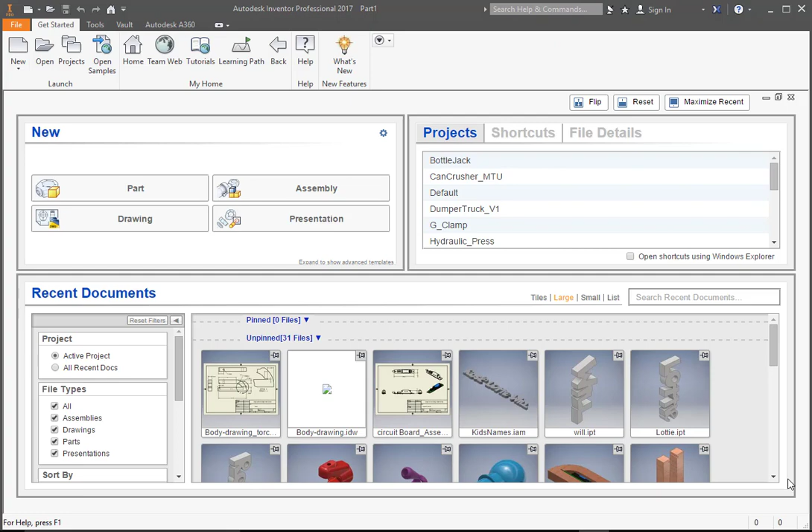This recording is for a small wooden storage unit, and I'm going to draw a side, a top, a side, a base and a shelf. So those are all separate components. Some of the components we're going to use twice, so that'll save some drawing time. So we're going to go new, check it's on metric, standard millimeter part, and create.

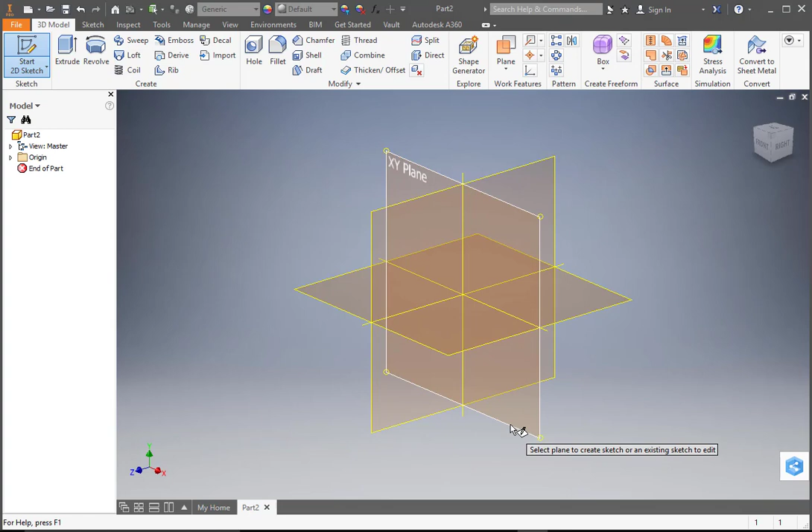Okay, now first thing we do, if you remember, you can either do start 2D sketch, or I can right click and do a new sketch. I'm going to just do up here for a minute. Okay, and I'm going to draw the side, so I'm going to use the side view on the XY plane, and I'm going to draw the side by clicking to select that drawing surface.

Next, I'm going to use my rectangle tool up here. I'm going to click in the middle, drag it out, and press click to stop the drawing. Now I'm going on to my next tool. You'll notice that I didn't dimension that, I didn't give that any measurements. So I'm now going to go on to another tool and just dimension that object.

Okay, and that object is going to be 200. I'm just going to use the middle mouse button to scroll out. 200, so it's now become very narrow. So I'm going to choose the bottom one and drag out, and make that one 60, and press enter. So if we have a look at our shape now, we've got a rectangle which is 60 by 200.

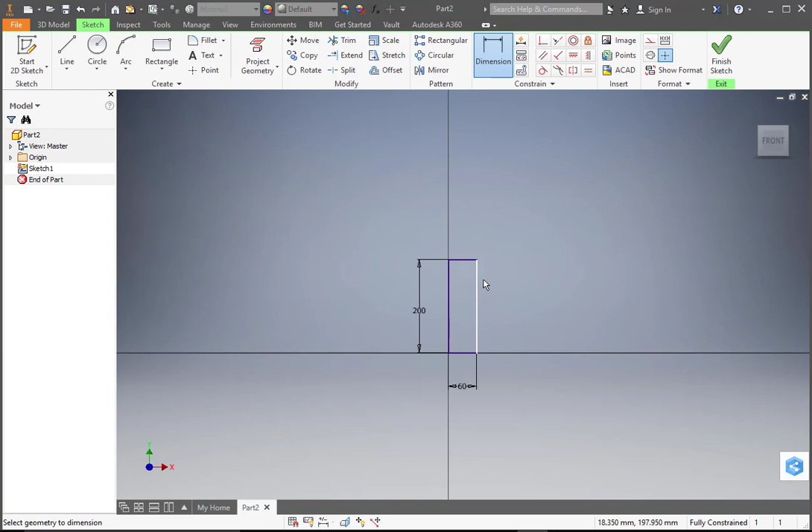So at the moment we've got a rectangle 60 by 200, and what I need to do now is step in to create a joint at the top. Okay, now I'm going to draw a line which is going to be the thickness of my material, and I'm not going to worry too much about where I put it, but I am going to make sure it runs straight and runs from the left hand side to the right hand side, joining up with those lines.

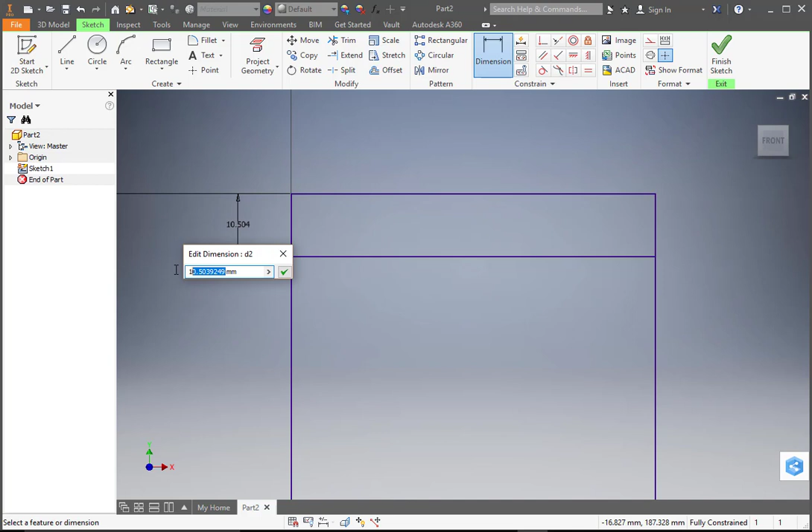I'm going to now position it again using my dimension tool. So if I click on the first line, click on the second line, click to place my dimension, and then I'm going to type in 10 because I want that to be 10 millimeters from the edge. Okay, I'm going to come down to the bottom.

We'll keep this simple, I'm going to do exactly the same thing again. So to remind you, I'm navigating around quite easily. Middle mouse button, scroll wheel zooms in. Clicking and holding down the middle mouse button allows me to drag it. Okay, so I'm going to zoom in at the bottom. I'm going to do exactly that process again.

Line tool, click, click, and then use the dimension tool, click, click, and drag, and then click to plant it. That was 10. Okay, so I've now got top and bottom, a 10 and a 10.

Okay, now what I've got to do is to now trim off in the middle. So I'm going to divide my 60 into 20, 20 and 20.

Right, now a couple of ways of doing this, but the easiest way is going to be to use the line tool. I'm going to click somewhere on this line and come up, and then click somewhere on that line and click on the top. So you'll notice that none of those have got proper dimensions at the moment.

If I now use my dimensioning tool, I'm going to click on the edge, click on the second line, and that means that line is now positioned 20 millimeters in from that line. So the next thing I'm going to do is dimension there and there. Click on the outside line, click on the inside line, click to plant it, turn it into 20.

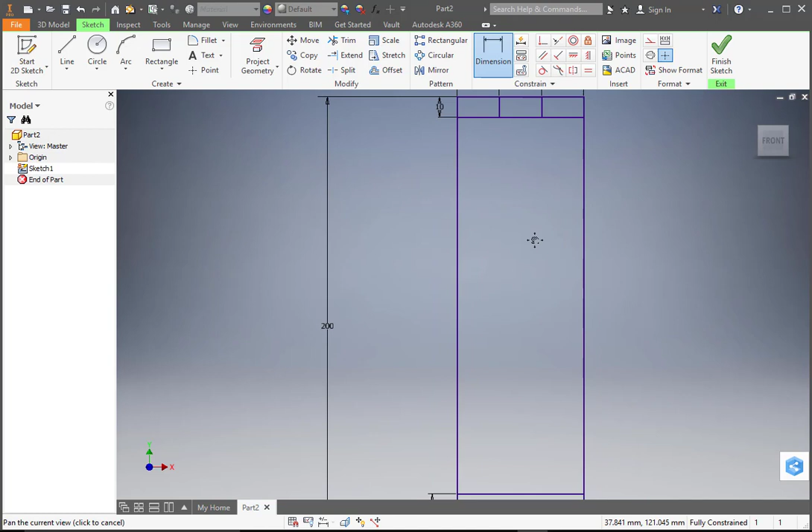Okay, now I'm going to do exactly the same thing on the bottom. Line tool, click on that line. You'll see that the lines try and snap to each other anyway, which means they connect sort of automatically. Then back to my dimension tool, click on the edge, click on the line, plant the dimension, 20. Click on the edge, click on the line, click to plant the dimension, and 20.

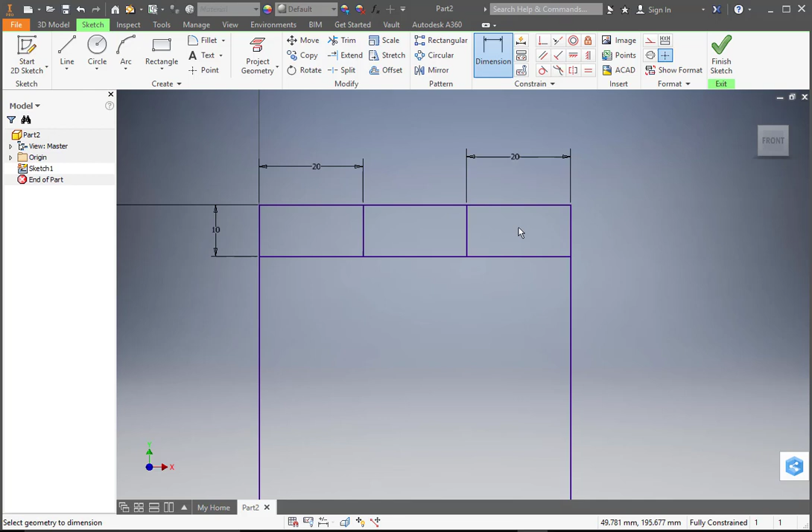Okay, now at this point I've actually finished this sketch. I'm going to try and save this, but I'll need to come out of my sketch first. This will allow me to use this same piece of artwork to do two different surfaces. One will be the side, and one will be the top and the bottom. But the only difference will be that on one I chop out this bit here, and on the other I chop out these two pieces, so that eventually they slot back together.

So what I'm going to do is finish that sketch. And then I'm going to go File, Save As. Make sure you know where you're saving. I'm going to save mine. I'm hoping that I've got a...

No, I'm going to call this one Small Storage. I'm going to create a new folder, new folder, and I'm going to call that one Small Storage. And into that small storage folder, I'm going to call this one Sides and Top. Right, so this is the starting point.

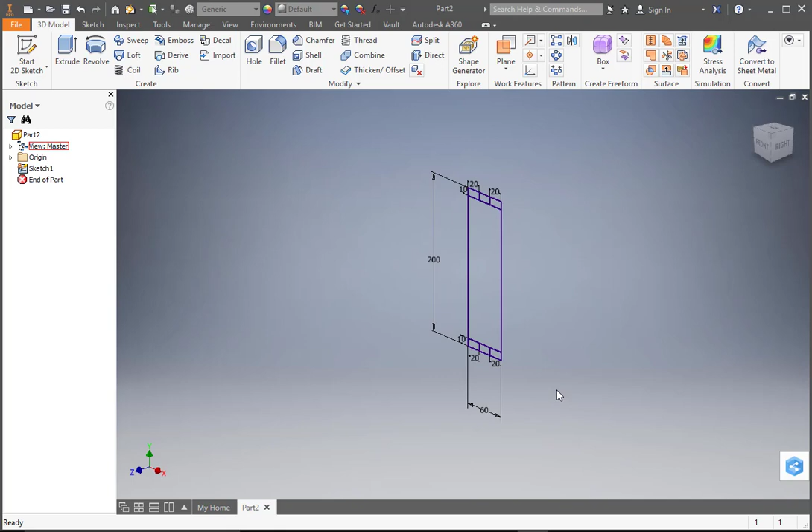So I'm going to save that. You'll see why in a minute, that'll make much more sense. Right, so what I'm going to do now is go and do some trimming to trim out my joint. Okay, so let's go back into that sketch. I come over here onto my browser, I right click and edit that sketch because it's not what I needed it to be at the moment.

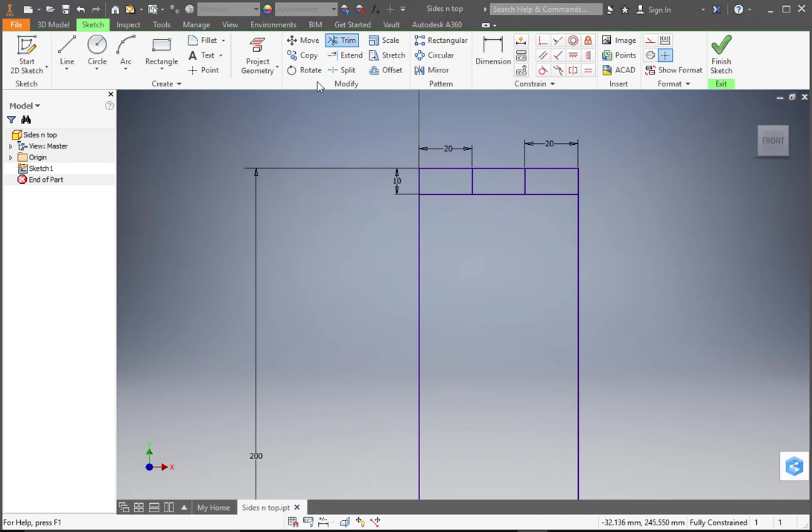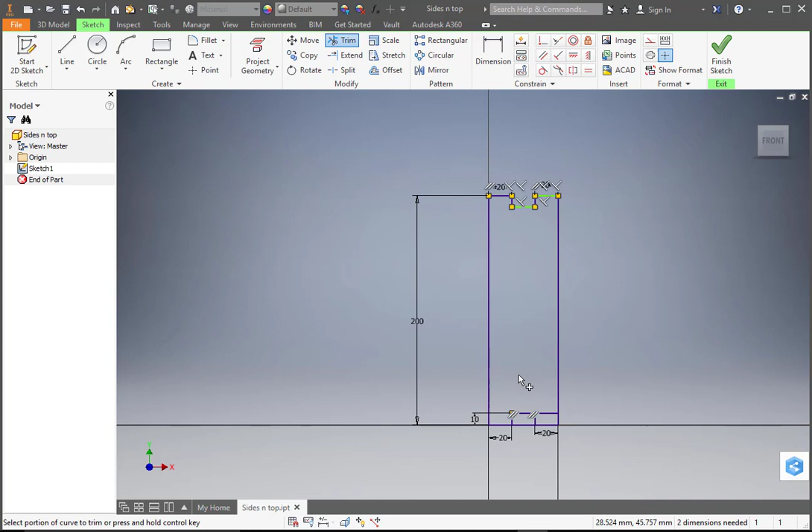Right, so remember this is my sides and top artwork. I'm going to now use the trim tool, which is the scissors and the line, and I'm going to trim away that bit of line, that bit of line, and that bit of line. So what I've actually got is a continuous bit there, a bit like the top of a castle. Now, same thing on the bottom. Remember, we've got to get it so we've got that continuous line. So I'm going to trim that bit away, trim that bit away, and trim that bit away.

Okay, so if I just zoom in, you can see here's our lines. All right, so now I'm going to finish that sketch.

Now I'm going to save this one as Sides. So I'm going to do another save as. Watch this. File, Save As, Sides, and Save. Right, so in my folder I've now got one which is called Sides and Top, and I've got one that I'm working on at the moment called Sides.

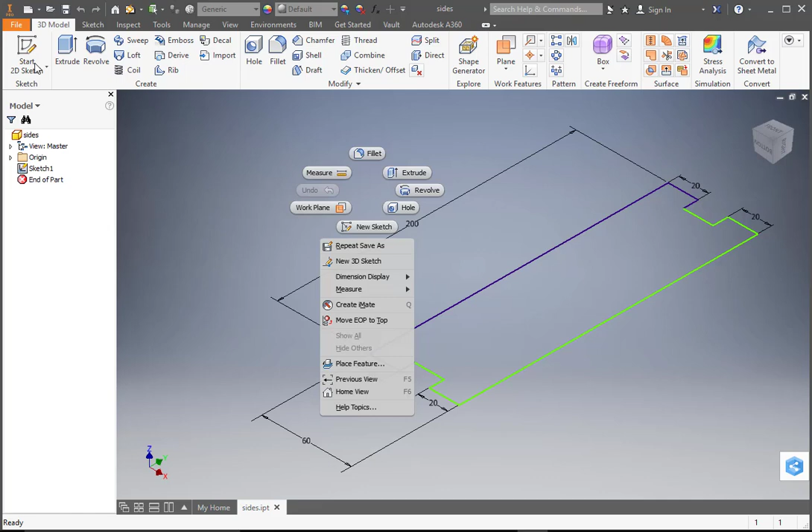Right, now I'm going to extrude this. Remember with the extrude you take a two-dimensional object and you turn it into 3D. So I can either right click and go to Extrude, or I can find it up at the top. So I'm going Extrude up here. It wants to know what I want to extrude, so I hover over my shape. It automatically gives me a highlight, and actually it's the right thickness. It's 10 mil. Then I green tick it.

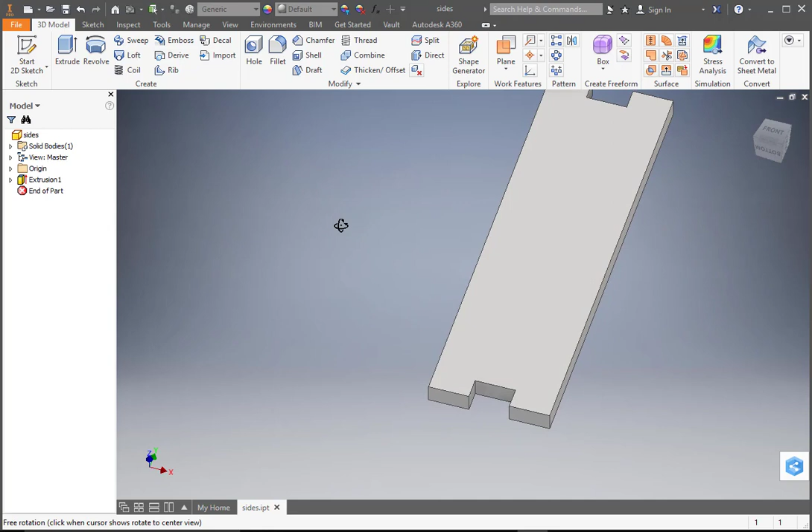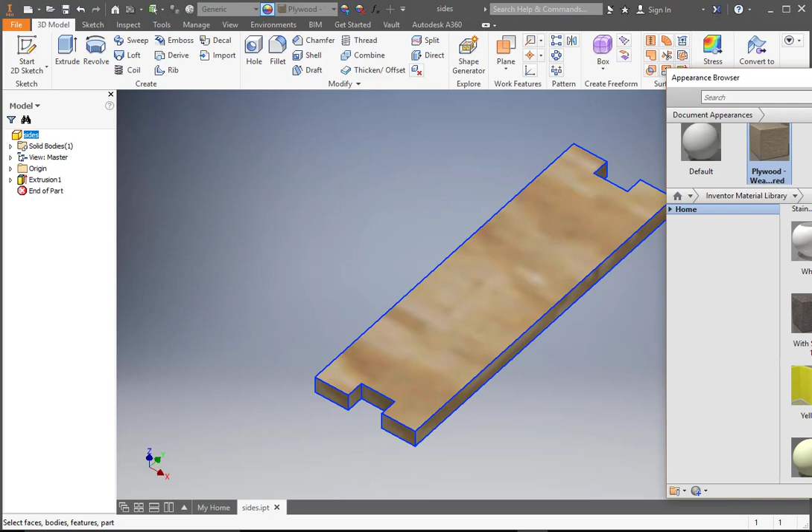Okay, so that's now given me the first part. This is my sides. All right, now before I go any further, I'm going to just go to my materials. So I'm going to click on the color wheel so it gives me all of my options. So that was up here. Click on that one. And I'm going to go and hunt down some wood. Yellow pine, that's going to be it, isn't it? So I'm going to put that up at the top. Make sure my model's selected and click on that again if it doesn't work. So I've now got a pine side. Close that window.

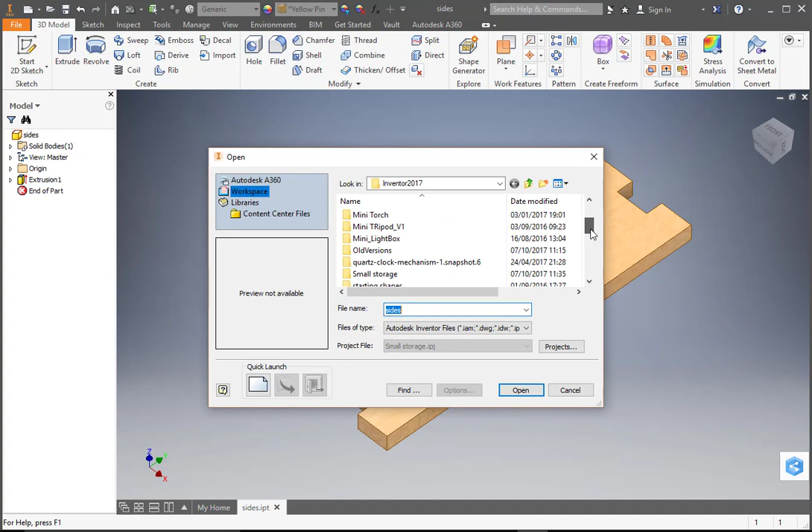So I'm going File and Save, so that updates my sides. Now watch how I'm going to use the previous one to create my top now. So I go File, Open, and I created a thing called Small Storage. I'm going to open Sides and Top, and open that. Right, so I've now got two open. There's my sides and top.

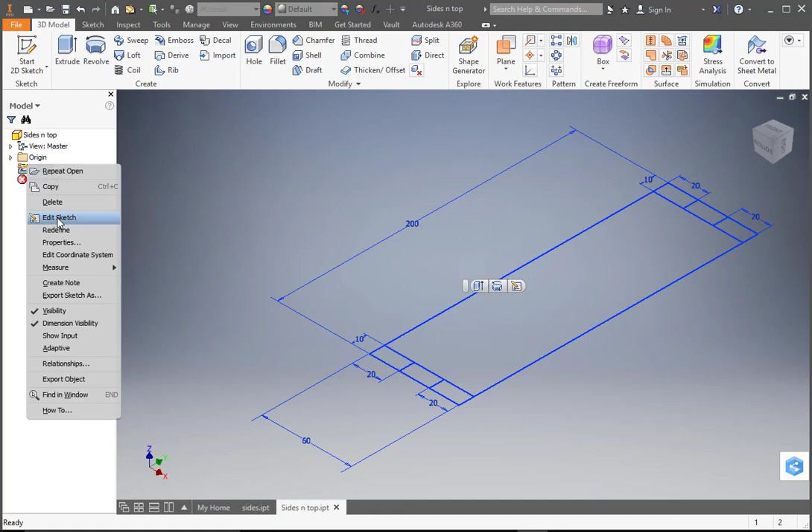So this time, instead of trimming out that middle bit, what I'm going to do is trim off these ends, these corner boxes. Okay, so I'm going into my sketch, right click, edit sketch. So we're just repeating the process that we've done before. Trim tool, I'm going to trim that bit of the line and that bit of the line. Let's just zoom in a little bit. That bit of the line and that bit of the line. And I have to remember, I'm going to get rid of this part as well.

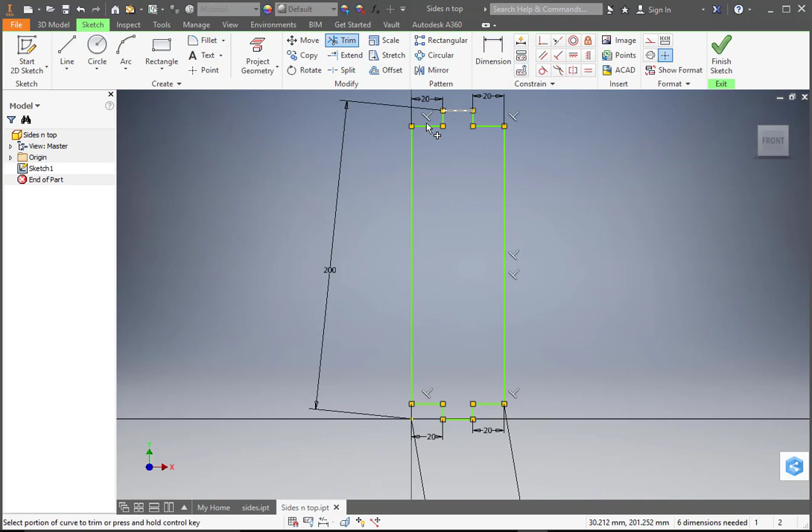My dimension lines have gone a little bit odd. Don't worry about it, we can ignore that. Okay, so I've now got this outside shape, and I can finish that sketch. And then I'm going to extrude 10mm, green tick.

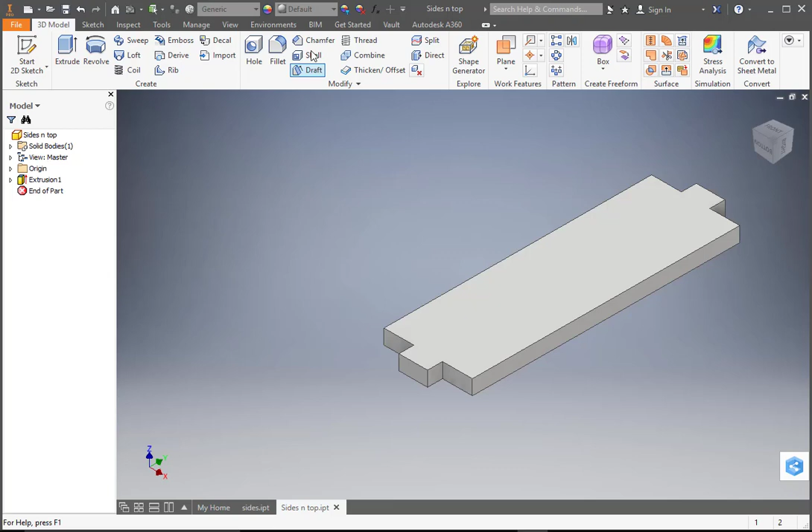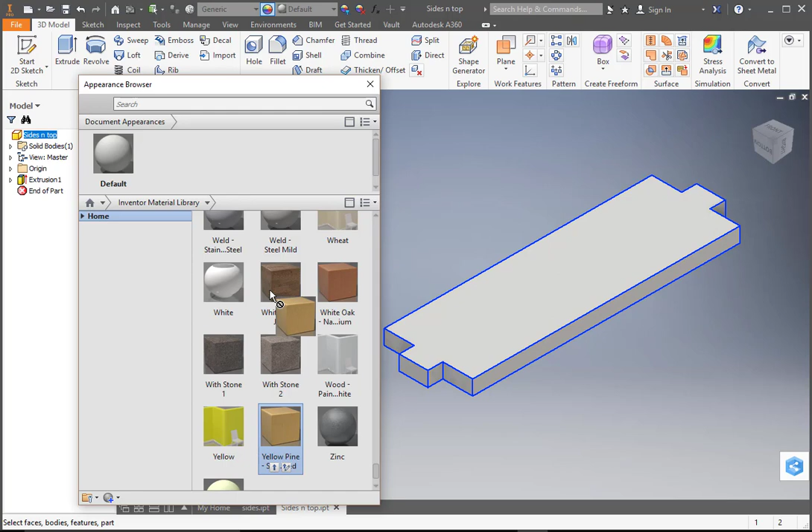Now I'm going to just do my materials again, because I think on the last bit of the video I had it slightly off the screen, so I'm going to do it over here now. Click on the button here. I'm going to drag that in so you can see what I'm doing. So this is my part. I can click on that to select it, and I'm going to then choose my material. And I think there was one down at the bottom that I found called pine, yellow pine, I think it was. Put that in the top and select the object, and close that browser. Right, so there's my top.

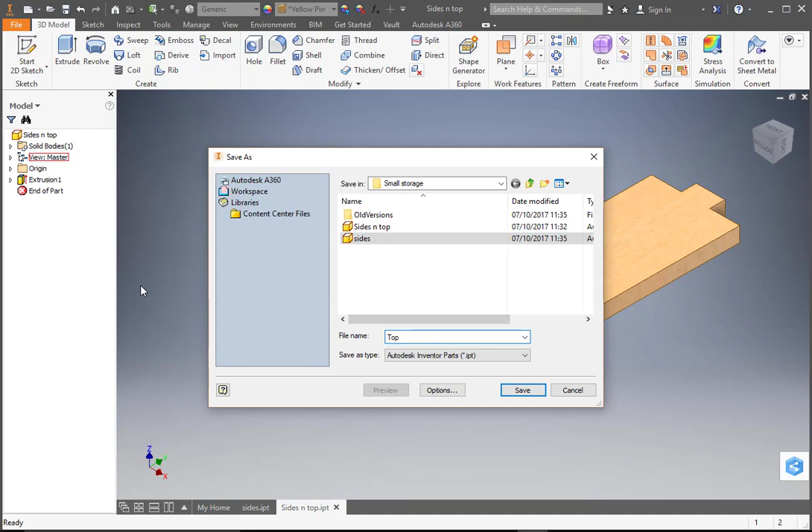So I'm now going to go File, Save As, and I'm going to call this one Top. So if you think about what we've got, a sides, which has got the gap in it, we've got the top, which has got the little peg sticking out of either end of it. So what I can do is assemble those as a simple shape.

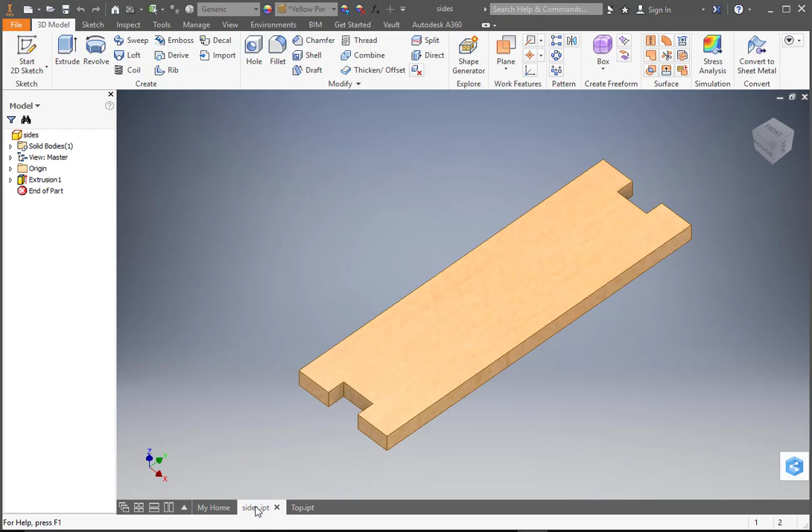Okay, but you remember how I got it off the original part? Let me just open up Sides and Top. If I go open Sides and Top, you'll see I've still got that source document if I needed to use it again. I've now got 3 parts. Let's close that. Right, got the sides, got the top, made, job done.

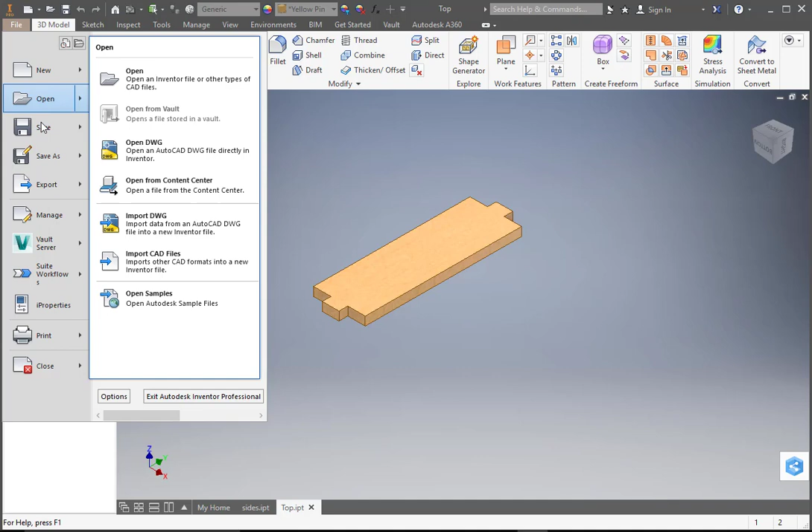So let's now go File, New, and we're going to put those together. File, New, and then we're going to do that as an assembly. Okay, which is this section here. And again, we're going to choose standard millimeter. IAM stands for Inventor Assembly, and we'll do that in our next video.